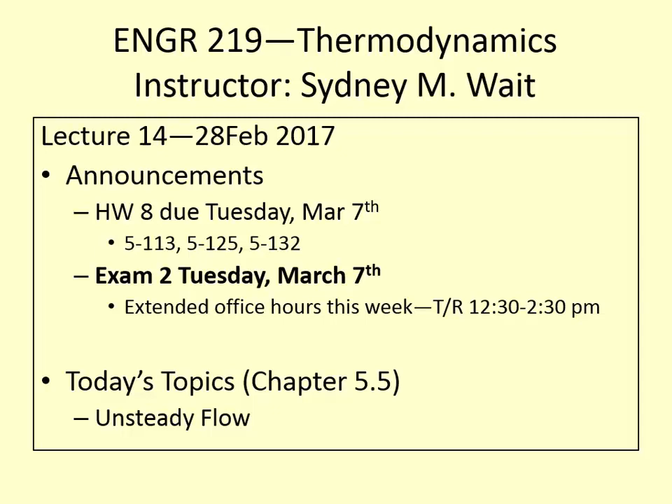Okay, so we talked about steady flow previously, and that most engineering devices operate under steady flow conditions. We talked about how we look at steady flow cases because that's the brunt of the operation time, but also because they're easier to analyze. So in steady flow, the properties of the control volume are not changing with time. You may have different property values at the inlet or at the outlet, but overall the system is steady. It's at equilibrium with its process, so the properties are not changing as the process proceeds.

But during unsteady flow, the properties of the control volume will change with time, so we have to take that into account. However, we need to have some finite time period over which to analyze it. We can't just say we're going to find the unsteady flow conditions of this particular engineering device without saying we're studying it for a certain amount of time. Because if it's unsteady flow and the property values are changing, we need to take a snapshot at some point to figure out what is the time period that we care about.

In many cases with unsteady flow, it's like from a start time until it reaches steady flow. That's usually what you're concerned about in engineering, or when you're at steady flow and then you turn off your system. What are the changes that happen as it ramps down?

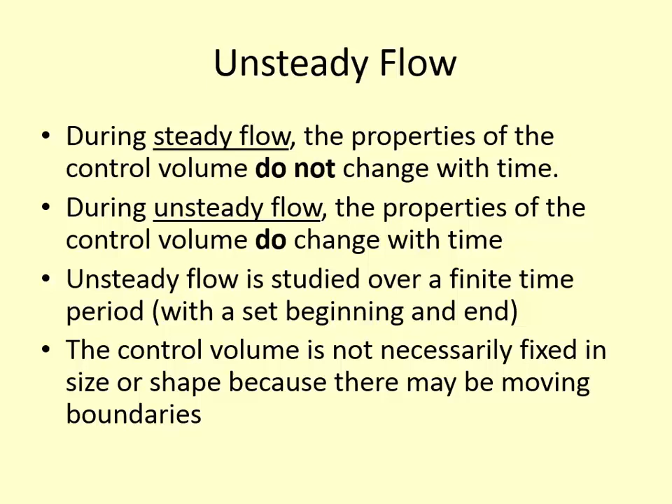So you can probably see how throughout the semester we're building upon the information that we learned earlier and then making our problems, our systems, a little bit more complicated. So we're learning the skills that will be needed to do a thorough engineering analysis of any system.

Similar to all of the other problems we've done up to this point, we can perform a mass balance for the system. But in this case, on the right-hand side of the equation, previously we assumed that the mass in was equal to the mass out. Well, now we have this change in the mass of the system. So the mass might be increasing, it might be decreasing, but we now have this change.

Similarly, we can rewrite this equation as m in minus m out is equal to the final mass minus the initial mass. Or in other words, if you're looking at your system, you can determine how much mass you have at the end, and if you subtract off the initial value, you know how much mass entered or exited your system during that time period.

You might also note that there's no dots over these. Again, because we're analyzing it over a finite time period, the time factor is removed. So we're not looking at it at an instant in time where there's some flow rate. We're looking over a time interval, so we are looking at total mass and total energy changes as we analyze these systems. So the m dot and the Q dots, the dots all disappear because time has been factored out.

If we want to just talk about it for a control volume, mi minus me, so that's the inlet and the exit. Sometimes this is also an O, mi minus mo, representing the inlet and the exit, is equal to m2 minus m1, or the final and the initial. Again, it's very, very important to keep track of your subscripts. So whatever nomenclature you decide to employ in your problems, make sure that you stick with it throughout the problem.

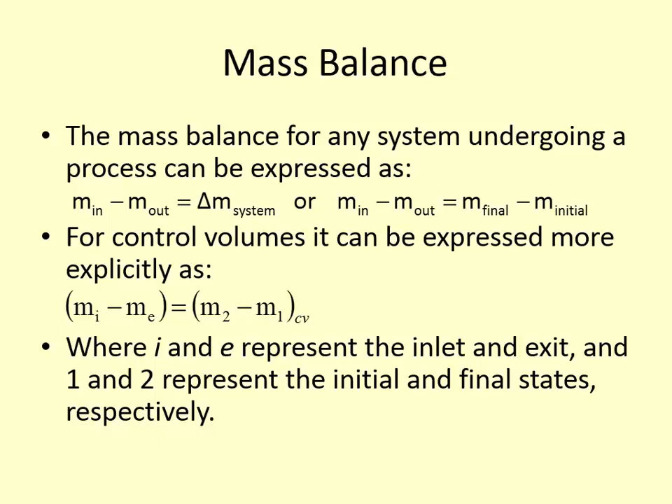We do make the assumption of uniform flow. Because our property values might be changing with time, we assume that it's uniform across the inlet and the exit, and that if we have some big, large system, we're assuming that it's uniform across the system. So there won't be significant temperature gradients or property changes, density changes, things like that across the control volume. We have to make that uniform flow assumption just so that we can analyze it using traditional methods.

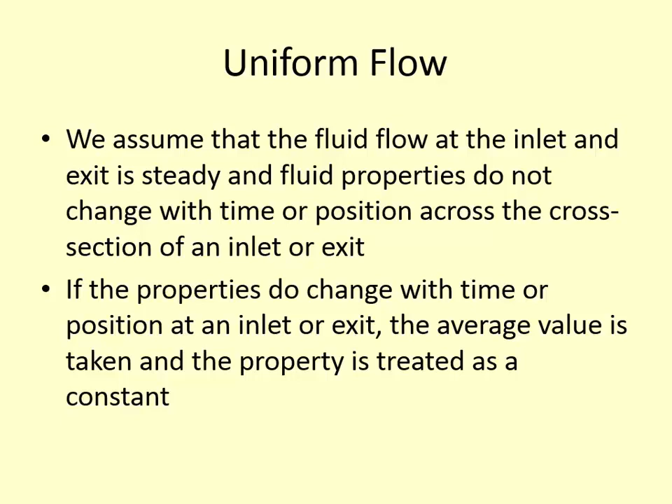Otherwise, we have to do a numerical model or a computer simulation to figure out exactly what's going on in the system. And then if the properties don't change with time or position, then the average value is taken and the property is treated as a constant. So we just say that it's some constant average value at the inlet or the exit. Sorry, if they do change with time or position, we take a constant value, not if they do not. If they don't change with time or position, then there's really nothing to analyze.

So we've talked about mass balance. This is the energy balance equation, and very similar to what we've seen before. Again, this right-hand side of the equation previously was 0. So now we have this m2e2 minus m1e1 of the system, or the change in energy of the system.

So for a uniform flow, this is the general form where Q in plus work in plus the sum of the flow work in, and the flow work includes this enthalpy term plus the kinetic energy plus the potential energy, minus Q out, work out, and then the sum of the flow work out. And then we're setting it equal to this m2e2 minus m1e1. And again, remember, this is the initial state, this m1e1, and m2e2 is the final state.

We're no longer looking at it as the inlet and the exit. That's on this side of the equation. So the inlets and the exits are on the left-hand side of the equation, and then the initial and the final state are on the right-hand side of the equation. So it's so important to know that that's physically what that represents, and that your subscripts should make sense to you when you write them down.

So if there's just single inlet, single outlet, then this sum term can be, where'd my laser go? This summation term can be, instead of a summation, it's just a single inlet. And then if we ignore kinetic and potential energies, then this theta term just turns into h. So this is another way of writing the exact same equation. You'll see it written in many different ways. It's all the same equation. It just depends on how you group your terms and what side of the equal sign you want to put them on.

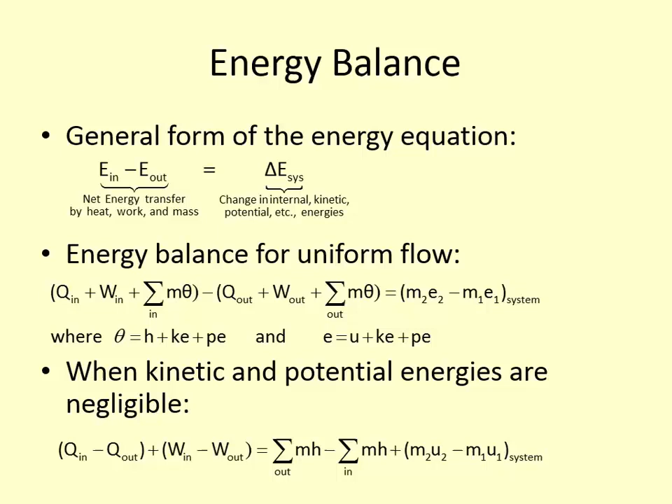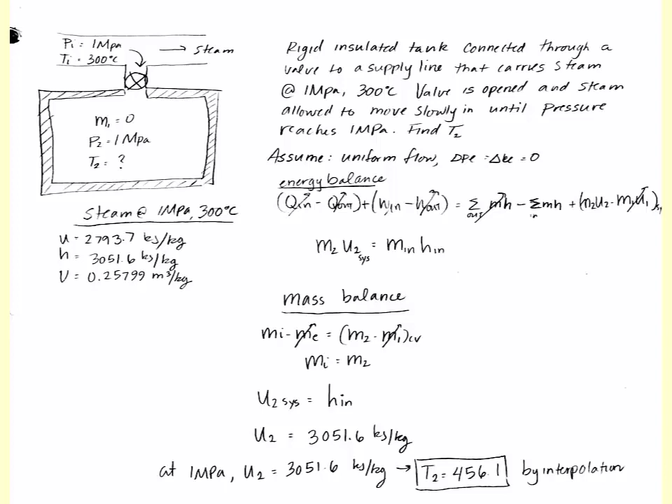Let's look at this another way. So you remember I said that we can also analyze it as a closed system where all of that volume of mass is then moved into the initially evacuated system. So we're looking at the entire thing as our system. So if it's a closed system, the energy balance is Q in minus Q out plus work in minus work out is equal to M times U2 minus U1. So we're saying that mass is just, we're relocating it into the chamber itself using some piston.

So again, Q in and Q out are 0. But now, instead of having 0 work interactions, we have a work in, which is our boundary work, is equal to M times U2 minus U1. So this work in we can rewrite as P V in, let's see, P times the volume that we move in. So we're changing this volume, or the change in volume of that, not being very clear, is equal to M, let's see, P times V times the mass is equal to M times U2 minus U1.

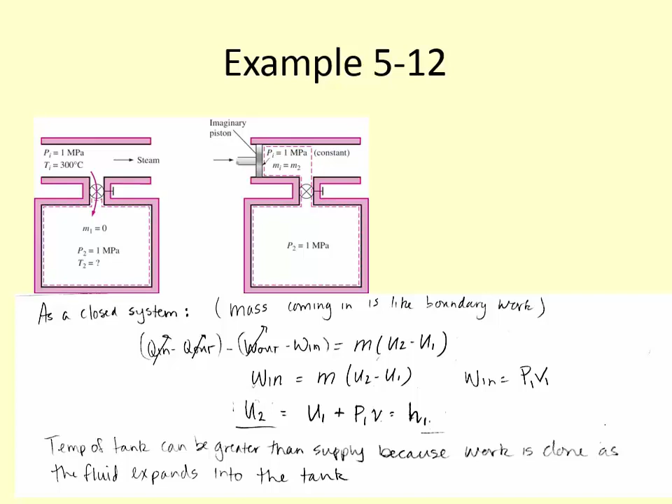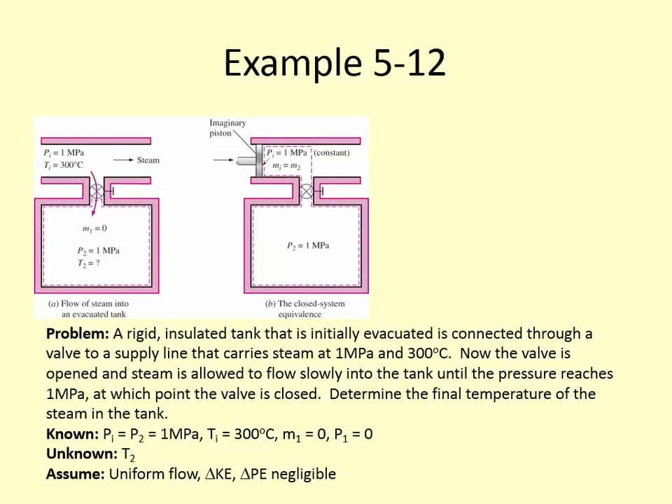Okay, any questions on that? And I don't expect you to analyze unsteady flow systems using them as a closed system. Like, I'm not going to say do that on an exam because it is a little bit trickier to think about. But being able to analyze it this way is important, and knowing that flow work is equivalent to boundary work in a closed system.

Okay, so let's do another example. As I mentioned, we're doing a lot of examples today. This time we have a tank that has a liquid vapor mixture in it. Can I erase this? Is everybody done here? Of R134A. So can someone read the problem statement for me?

So we've identified our system as an unsteady flow system. There's a tank, there's liquid vapor in it, there's a valve at the bottom where the liquid can flow out. And this, by the way, would be a common thing that you would encounter, like in refrigerant systems. Sometimes they're drawing off the liquid so that they can revaporize it. Often you'll have a valve in the bottom so you can pull off the liquid, and then a sensor that tells you when vapor starts coming out, and that's used to be more efficient so that you're not trying to, again, pump vapor. So the volume is known.

Let's start by identifying the system, listing assumptions that it's uniform flow, constant pressure, because there's a liquid vapor mixture in there, and then the changes in kinetic and potential energy are negligible. Okay, so let's look at our state 1 initial. What are the conditions on it? So P1 is 800 kilopascals. V1 is 0.12 meters cubed. What else?

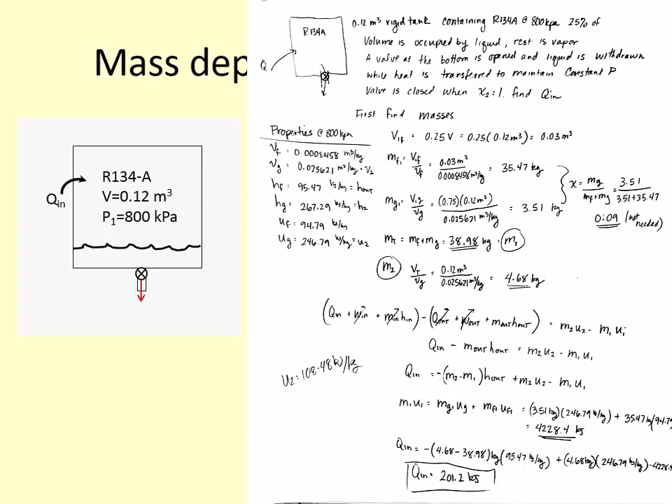But I just did everything all symbolically, and then I ended up putting the numbers in that way. You'll get the same answer. There's two different ways to skin a cat. Okay, any questions on that? So even I was getting confused, and I had the paper in front of me on this particular one. When there's a liquid-vapor mixture in the tank, it makes things significantly more complicated because you have the fluid state, the gas state, the inlet state, the outlet state. You have to be very careful to keep track of everything.

So let's do another one where we have a liquid vapor, and this time we have mass flowing into the system. So again, it's R134A, this time at 8 degrees Celsius. So the tank is full of R134A at 8 degrees Celsius, and the quality is 70%, or 0.7. The tank is connected to a supply line with R134A at 1 megapascal and 100 degrees Celsius.

So we're going to approach this problem in a similar way. The valve is open, the refrigerant is allowed to enter the tank. When the pressure in the tank reaches 800 kilopascals, then the refrigerant in the tank exists in the saturated vapor state only, and the valve is closed. So let's go through again, and we have this nice picture up there. We're assuming kinetic and potential energies are negligible, that there's uniform flow.

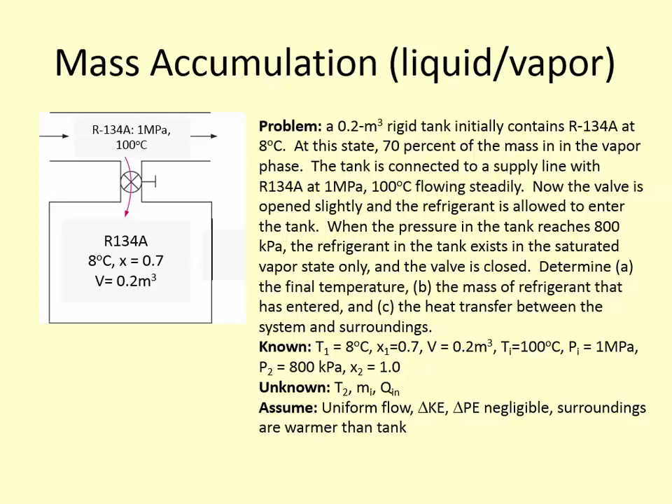We don't know it for certain, but we assume that Q is going to be flowing into the tank. And if we make an incorrect assumption on that, our negative sign at the end will tell us we need to go back and look at things. So we have a state 1 initial, a state 2 final, and instead of having an outlet, now we have an inlet condition. Okay, so state 1, what is our initial condition of this R134A? T1 is 8 degrees Celsius, and our quality is 0.7. What's our final state?

Okay, it's saturated vapor, so the quality is equal to 1. So our quality is 1 and our pressure is 800 kilopascals. Okay, so those states are fixed. We'll be able to look up all the property values at the initial and the final state. What about our inlet conditions? What's coming in? So 1 megapascal and 100 degrees Celsius. So this is Pin, Tin, this is X2, P2, and this is T1 and X1.

Okay, so let's look up some of the property values. Actually, before we do that, let's do the energy balance to figure out what property values we actually need, so we don't waste time getting ones we don't need. So Q in minus Q out plus work in minus work out plus M in H in minus M out H out is equal to M2 U2 minus M1 U1.

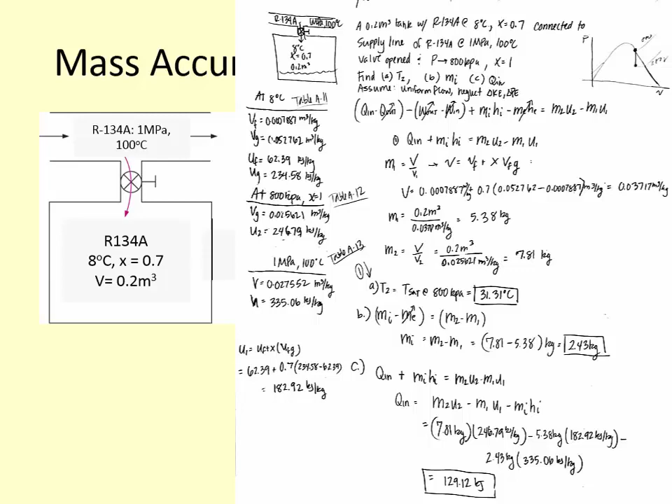Okay. So prior to now, all of our boundaries have been fixed except for the one problem where we assumed it was a closed system with a moving boundary. But let's look at how it changes when our boundaries are moving. So it just adds another layer of complication in some ways. But again, we follow the same procedures.

So in this case, we have helium filling a balloon. The balloon initially contains 65 meters cubed of helium at 100 kilopascals and 22 Celsius. The balloon is connected by a valve to a large reservoir that contains helium at 25 Celsius and 150 kilopascals. Now the valve's opened and helium is allowed to enter the balloon until pressure equilibrium is established with the supply line.

The material of the balloon is such that the volume increases linearly with pressure. If no heat transfer takes place during this process, determine the final temperature in the balloon. Okay, so we can make some assumptions. We're assuming it's uniform flow and that we're not worried about kinetic or potential energies. We can also assume it's an ideal gas because helium can be considered an ideal gas.

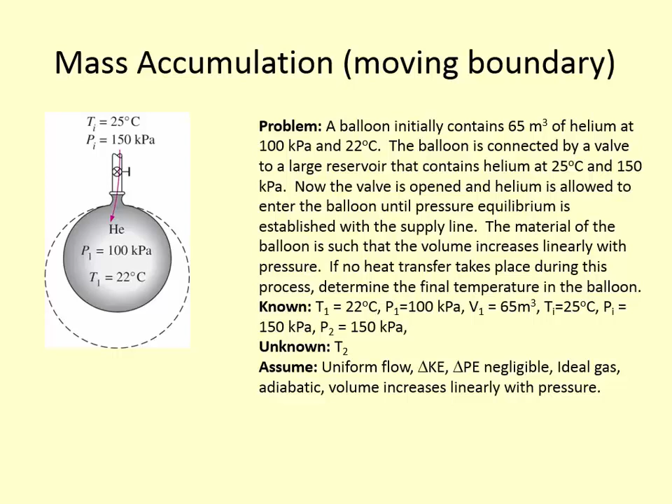And then they told us to assume that no heat transfer takes place, so it's adiabatic, and that our volume is increasing linearly with pressure, so we don't have to worry about the forces of the balloon changing the pressure and things like that. So we've got a nice picture up there. Let's start with our properties. So we have some things labeled on there. Let's talk about state 1, which is our initial, state 2, which is our final, and our inlet conditions.

Okay, so what do we have at state 1? So P1 is 100 kilopascals. T1 is 22 degrees Celsius. And then do we know anything else? Okay, V1, 65 meters cubed. Okay. What about our final state? What do we know?

Okay, so what is the pressure going to be? Okay, what is that value? So P2 is going to be at equilibrium with the supply line, so it will be 150 kilopascals. Do we know anything else about state 2? We don't know T2. We're asked to solve that, final temperature. We don't know necessarily the volume, but we do know that the volume is increasing linearly.

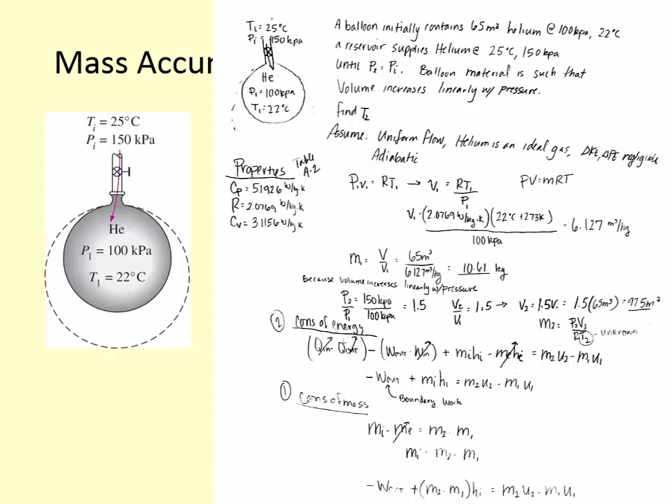We drew a picture, right? So the pressure and the volume, we can draw a picture. So we have 100 kilopascals and 150 kilopascals. But the boundary work is going to be the area under this curve, so 65 meters cubed and 97.5 meters cubed. And we can calculate the boundary work, if we just find the area of that, will be 4062.5 kilojoules.

So now we have this equation where we know the boundary work, and we know U1, we know M1, we know M in and H in, but we don't know M2 and U2, but they're both dependent on the temperature, so we're going to write everything in terms of temperature. So M2 is equal to P2 V2 over R T2. U2 is equal to C sub V times T2. U1 is equal to C sub V times T1. H in is equal to C sub P times T in.

So if we put all of these into our original equation, where we already solved for the boundary work, we get our negative boundary work, plus, and then also the fact that M in is equal to M2 minus M1. Sorry, I'm going to write this symbolic equation for this. So the negative boundary work plus M2 minus M1 times H in equals M2 U2 minus M1 U1.